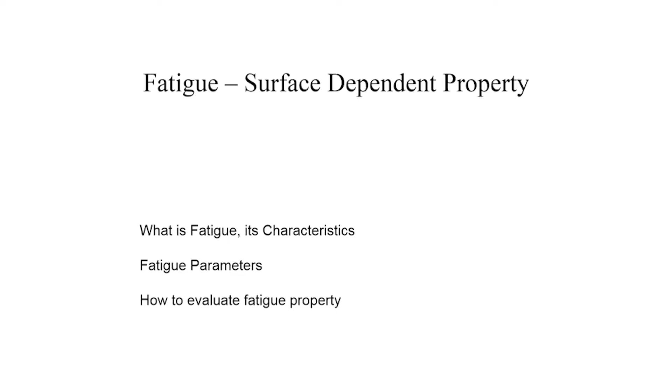Hello. In this talk, I am going to discuss another important mechanical property of matter: fatigue. I will give a brief introduction to fatigue, discuss its characteristics, the parameters which influence fatigue, how it is represented, how to evaluate fatigue properties, and finally the techniques to improve the fatigue properties of materials.

Fatigue is defined as a failure that occurs in a structure subjected to dynamic and fluctuating stresses. Under these circumstances, failure usually occurs at a stress level considerably lower than the tensile or sometimes yield strength of the material under static load.

If you go through the characteristics of the failure, it is a little different from failure under uniaxial tensile loading. It is usually brittle in nature, consists of two stages - initiation and propagation - and the fracture surface is usually perpendicular to the direction of applied stress. It is insidious in nature, making it a very dangerous form of failure in components.

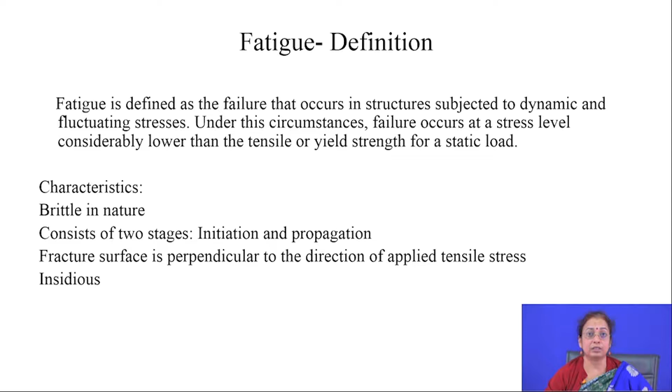Looking at cyclic stress under uniaxial loading, when a component works it is easy to define the stress level, but when cyclic stress operates on a component, you have to define the stress carefully. Usually the cyclic stress may be axial in nature, flexural in nature, or torsional in nature.

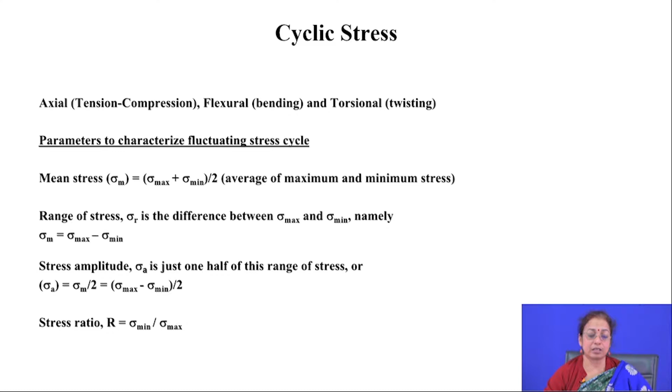Going through the parameters to characterize fluctuating stress: it may be mean stress, which is the average of the maximum and minimum stress the component is subjected to; range of stress, which is the difference between maximum and minimum stress; stress amplitude, which is range of stress divided by 2; and stress ratio, which is the ratio between minimum stress and maximum stress. By these four parameters, cyclic stress is represented. Whenever you talk about cyclic stress, you have to refer to any of these parameters.

Now, if you go through the way fatigue property is measured, it is measured by a typical testing method called rotating bending testing. In this test, you have a typical tensile specimen which is subjected to continuous rotating and bending operation.

When the component is subjected to loading, you will find that one part of the component is bent - one side is subjected to tensile loading and the reverse side is subjected to compressive loading. When you rotate the component, the reverse phenomenon occurs - the side which was subjected to compressive loading now faces tensile loading, and the other surface faces compressive loading.

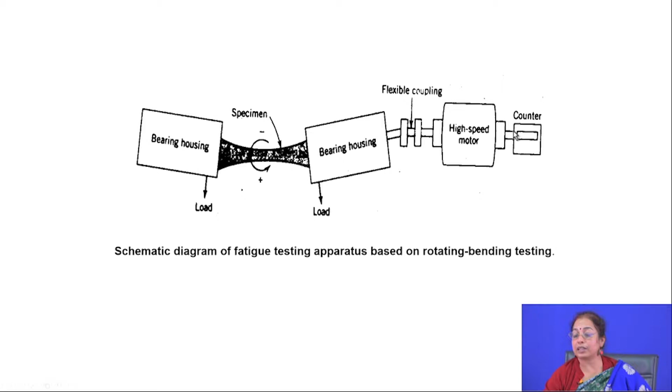By this process, the same side of the component is repeatedly subjected to compressive and tensile loading, and the number of cycles to failure is recorded with the help of a counter, defining the number of cycles to failure for a particular stress level.

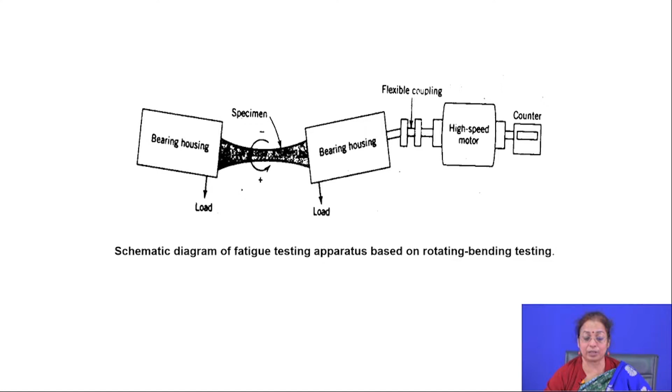In this testing, you need a large number of samples. You go on changing the cyclic stress with different values, and find the number of cycles to failure under each cyclic loading operation, under each mean stress or under each stress ratio.

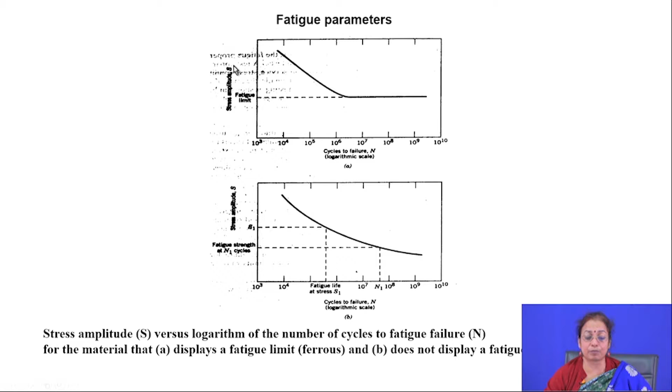Then you represent the fatigue properties in terms of cycles to failure as a function of stress amplitude, which is commonly applied as the parameter to define the cyclic stress.

If you go through the number of cycles to failure as a function of stress amplitude, you will find different behavior in ferrous and non-ferrous materials. This is a schematic representation of the fatigue behavior of ferrous material, and this is for non-ferrous material.

You will find that in ferrous material, when the stress level is below the fatigue limit - below a certain value of stress amplitude - there is no failure at all. We call this the fatigue limit. It is usually taken as the safe limit or safe cyclic stress where the component can be applied very reliably.

But when the stress amplitude increases above the fatigue limit, there is a chance of failure. So you have to use the component at a cycle much lower than the designated cycles to failure under this particular stress amplitude.

On the other hand, if you go through the fatigue behavior of non-ferrous materials, it does not have any sharp fatigue limit. As you decrease the stress amplitude, the cycles to failure actually increases. So you have to always define the typical stress amplitude at which there is a certain number of cycles to failure.

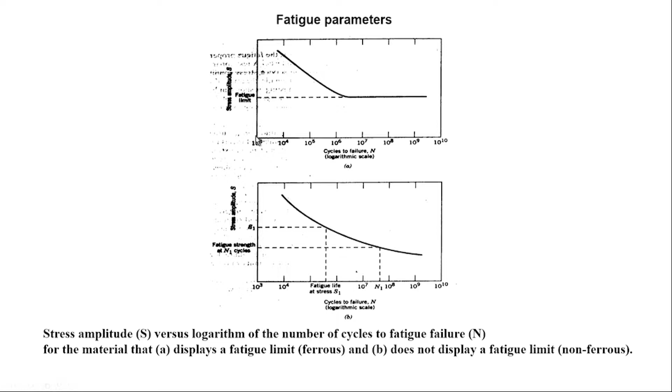So these are the two important ways by which you basically define the fatigue properties of ferrous as well as non-ferrous materials. The other way by which you can designate the fatigue properties of the material is nothing but the probability of failure.

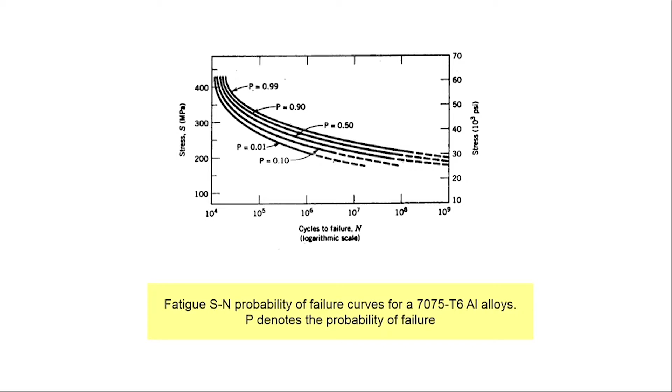So when probability of failure is negligible, you can use the particular material at that particular stress limit in a very safe fashion, at that stress amplitude, in a safe fashion.

Now, if you go through the stages in fatigue, you will find that fatigue proceeds in stages. Stage 1 is the crack initiation, and stages 2 and 3 are the crack propagation stages. So crack initiation is called stage 1, and crack propagation consists of two stages, stage 2 and stage 3.

If you go through the reason behind crack initiation, you will find it is because of the presence of impurities, imperfections on the surface, defects on the surface, and stress concentrations at the surface. So impurities, defects, and stress concentrations at the surface are responsible for crack initiation.

As I was mentioning, fatigue is very much dependent on the surface. This is because fatigue crack initiation is dependent on the surface imperfections. So if you prepare a surface free from any flaws, imperfections, impurities, and stress concentration points, you can always improve the fatigue life of the component.

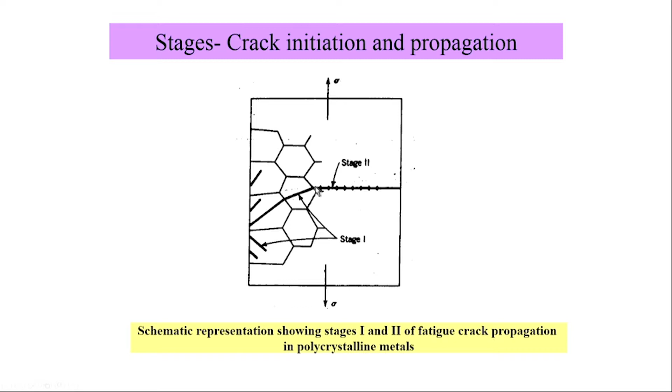On the other hand, when the crack length exceeds the critical crack length for failure of the component, the crack proceeds at a much faster rate—that is stage 2 crack propagation. It is very difficult to control. Stage 2 crack propagation rate depends on the fracture toughness of the component. You cannot, by any surface treatment, control or prevent stage 2 crack propagation.

This is very important to note: if you want to minimize or improve the performance of the component under fatigue loading, you have to improve the surface very nicely so that there are no imperfections, no inclusions, no stress concentration points at the surface. Or otherwise, you harden and toughen the surface in such a fashion that stage 1 crack propagation rate reduces to a large extent.

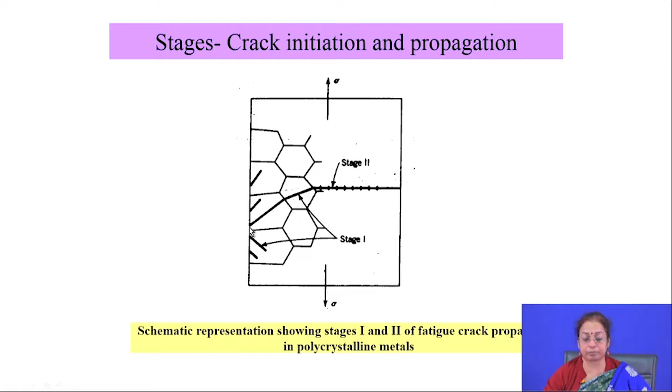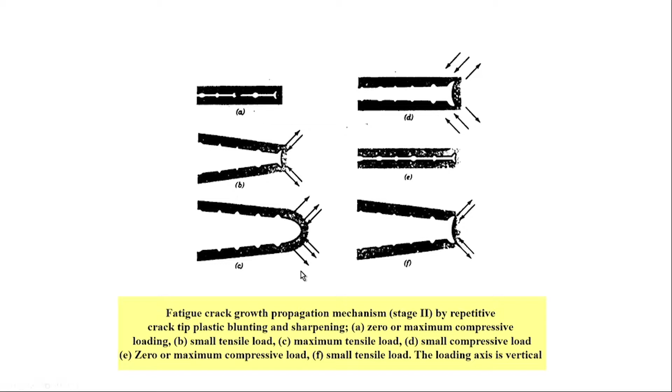Now, quickly going through stage 2 crack propagation: you will see that the stage 2 crack propagation mechanism is by repetitive crack tip plastic blunting and sharpening. So once the stage 1 crack propagation occurs...

...that creates a crack having the crack length near to that of the critical crack length. Then, whenever it is subjected to repetitive compressive and tensile loading, whenever subjected to tensile loading there is crack widening and subsequent plastic blunting phenomena, and when subjected to compressive loading, there is closure of the crack, and then again closure and again widening.

So stage 2 crack propagation consists of 3 stages: one is crack widening during tensile loading, then plastic blunting, and during compressive loading there is again closure of the crack. By this process, the crack advances by one unit step. So advancement of the crack occurs with the tensile component of the loading, and then again there is widening phenomena.

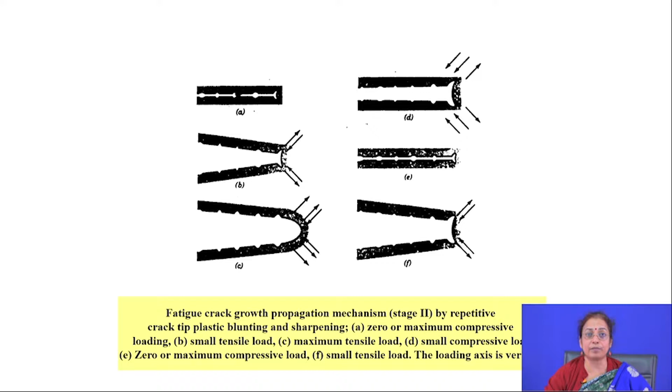So you can see that typical crack propagation or crack length enhancement occurs during the tensile component of the loading. It is very important that when you apply compressive loading, there is a closure phenomenon. So compressive stress is not really so harmful for propagation of the crack, but rather tensile stress is very harmful.

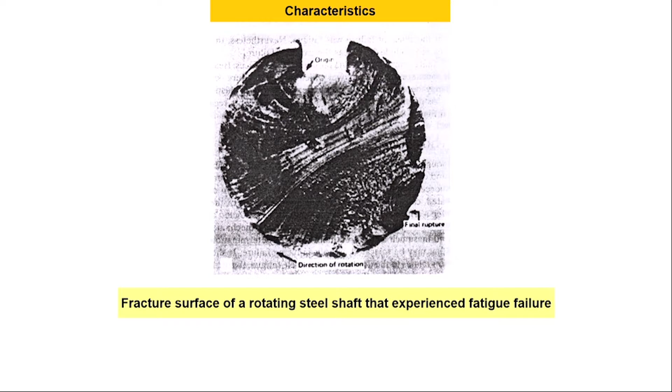Most of the crack propagation occurs during the tensile component of the loading. Now, going through the characteristics of fatigue failure: it is very important to know the characteristics of the failure of the component so that you can understand the reason, and also get preventive measures so that the component does not fail in service due to that particular failure. The characteristic of a failed surface of a fatigue-failed component is that there are a lot of beach marks, small...

...bands on the surface, like sea beach marks. When air blows on the sea beach, you find blowing marks, some beach kind of pattern. Because of this appearance, it is called a beach mark. There are also crack initiation points observed, and final cracking points are also visible. So there are 3 important features: crack initiation points observed, beach marks observed, and the failure points or zone of failure also observed in the failed surface.

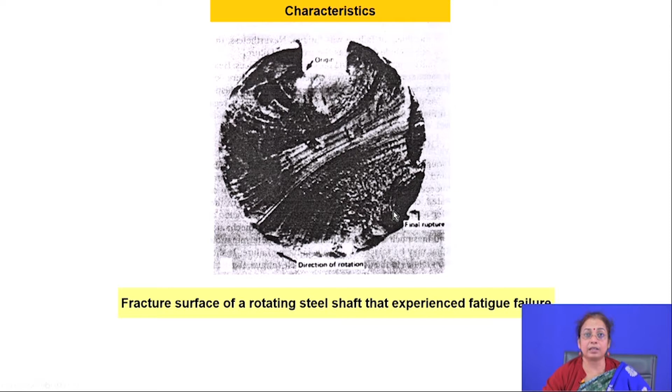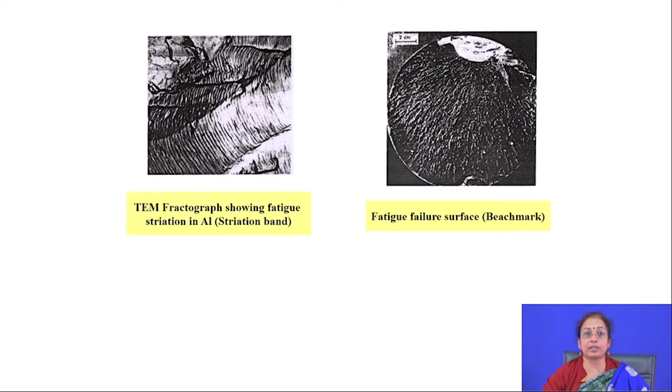Now, going through the beach mark at very high magnification, particularly through TEM observation, you will find very fine striation bands in the beach mark. This striation band length is basically the unit length that the crack propagates during the tensile loading of the component. This is a typical repetitive phenomenon, and it is very much dependent on the component, the magnitude of the load the component is subjected to, and also dependent on the microstructure and composition of the component.

Now, going through crack length as a function of number of cycles to failure, you will find that the rate of crack propagation with number of cycles to failure is very much dependent on the amount of stress amplitude the component is subjected to. As the stress amplitude increases, you will find that the rate of crack propagation also increases. So the rate of crack propagation, or the fatigue life of the component, is very much dependent on the stress amplitude value, to a large extent.

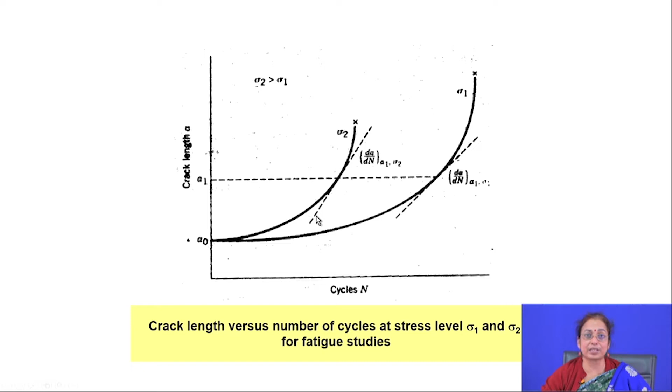If you can reduce the stress amplitude by that process, you can reduce the crack propagation rate as well. Let's quickly go through the parameters which control the crack propagation rate, where A is the crack length and N is the number of cycles to failure.

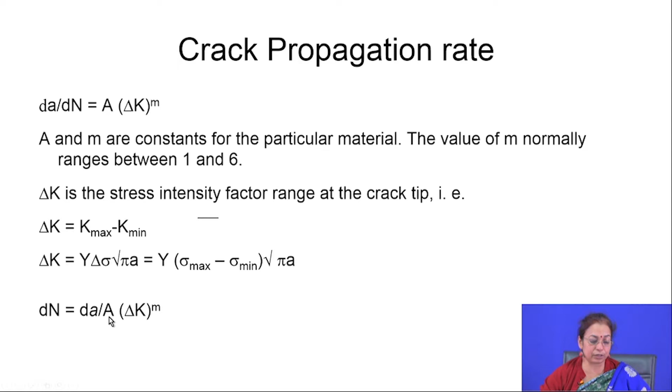If you go on measuring these and plot the fatigue crack growth rate as a function of stress intensity factor on a log plot, you will find there are 3 regions. Region 1 is where there are non-propagating fatigue cracks, region 2 has a linear relationship between log del K and log dA/dN, and region 3 is unstable crack growth where it is very difficult to control the crack propagation rate.

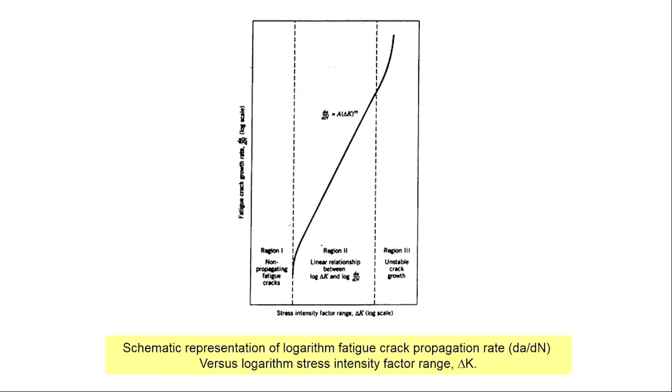So usually the material is safe, or it is better to use the material in region 1, where the fatigue cracks cannot propagate. This is a very useful plot to determine the service usefulness, to dictate the fatigue stress intensity range, or the stress range, or the fatigue limit of the component where it should be used.

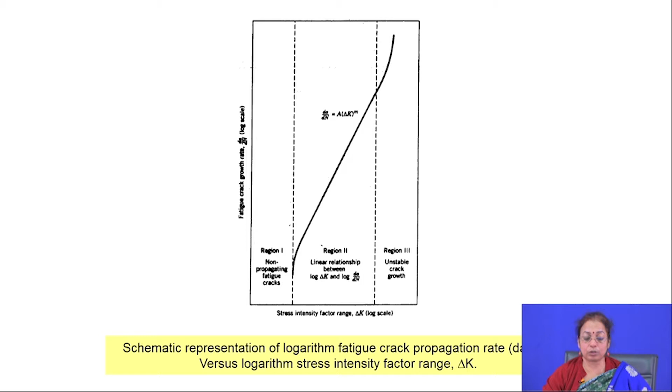Now in summary, we can say it is very important to concentrate on the surface in order to improve the fatigue life of the component. But in most cases, particularly when the component is in service, if you have to design it for improved fatigue life, usually it is done by proper designing.

The basic phenomena or key point is that you have to avoid the points where there is a chance of stress concentration. This is done by proper designing of the component. Usually you should avoid sharp points or corners and make them a little smoother, wherever there is a chance of change in curvature. By this process you can improve the fatigue life.

You can also improve the fatigue life by proper surface treatment. The important surface treatment techniques that most people apply try to avoid the points of stress concentration, reduce the roughness of the component, and reduce imperfections on the surface, and reduce the stress level on the surface. This is done by proper polishing operations, including electropolishing, using polishing operations that do not create much stress on the surface.

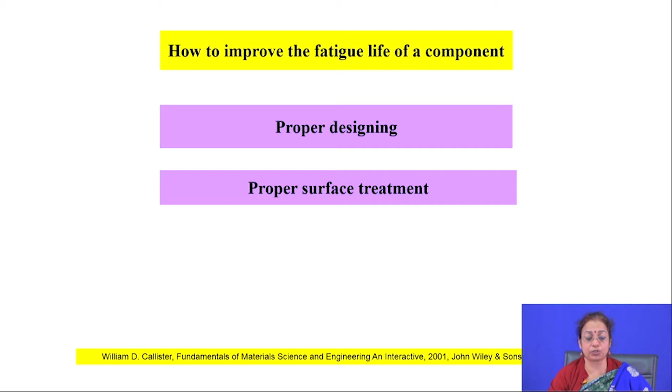If you quickly go through the stages of crack propagation, particularly stage 2 crack propagation, you'll see it consists of repetitive crack widening, plastic blunting, and then closure of the crack. Closure usually occurs when compressive stress acts on the component. So compressive stress is beneficial in improving the fatigue life of the component. If by any technique you introduce compressive residual stress on the surface, you improve the fatigue life of the component.

Compressive residual stress is usually applied by different ways like shot peening, laser shock peening, low plasticity burnishing operation, and deep cold rolling processes. These techniques are widely applied for introducing residual compressive stress on the surface.

In shot peening operation you go on impacting shots made of steel or ceramic materials, usually spherical balls, which are thrown onto the surface at a certain velocity. This introduces a lot of compressive residual stress on the surface, but the main problem is that it introduces nano or sometimes micro deformation on the surface. So whenever you do shot peening, you have to be careful about the appearance of the surface. But it is a very good technique because it takes care of the fatigue property and also cleans the surface to a large extent.

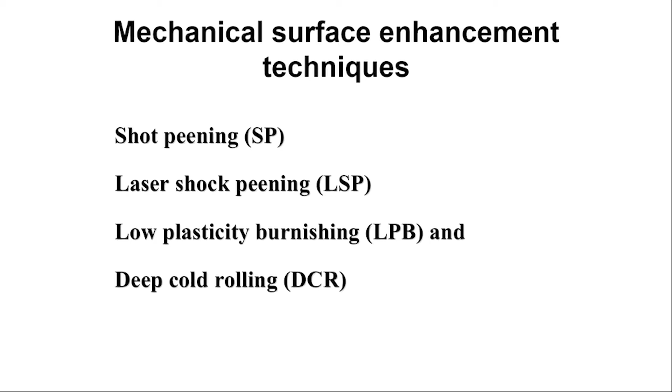Usually if you apply shot peening after carburization, or flame hardening, or induction hardening, note that these processes form a very thin oxide layer on the surface, so the surface is not so clean. If you apply shot peening afterward, it cleans the surface to a large extent, and in addition introduces compressive residual stress on the surface. So this process is very beneficial in improving the fatigue life of the component.

Laser shock peening is another interesting process, where a high powered, high energy density pulsed laser beam irradiates the surface of the component. When it irradiates the surface, there is ablation of material from the surface, and the energy density is so high that the ablated gaseous species convert into plasma. That plasma applies pressure on the surface of the component, and that pressure causes compressive residual stress to be introduced onto the component. This is called laser shock peening.

This operation can be conducted in air, in water, or with a very thin black painting applied on the surface. If the surface is covered with water or black paint, it minimizes the probability of ablation of material from the surface. Instead of ablation of material from the surface, there is evaporation and plasma formation from the media, maybe water or the ink. That evaporated material forms plasma, and that plasma applies pressure on the surface.

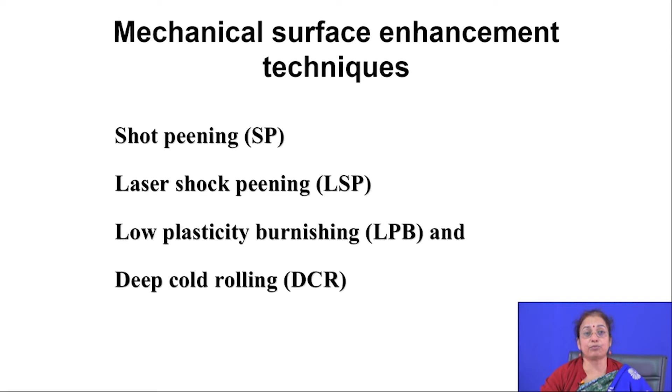By that process you can get rid of discontinuities on the surface or any other impurities present, which reduces the probability of crack initiation. You can also improve the fatigue life of the component, particularly by minimizing the stage 1 crack propagation rate, which can be achieved by surface hardening operation.

Different surface hardening treatments are available which can be applied for improving the service life of the component under fatigue, for example carburization of low carbon steel and subsequent tempering operation. This is a very good treatment for improving the fatigue life of the component.

Usually when you do carburization or nitriding, a very thin hardened layer is formed, and that layer is harder than the pure metal. So it increases the hardness and also the fatigue limit of the component. These are different ways you can improve the fatigue property of the component.

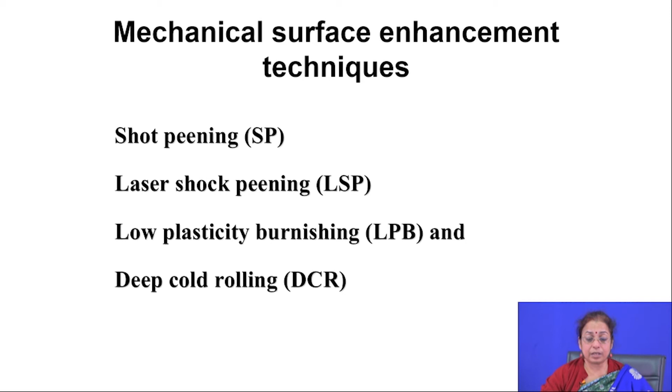Now in summary, we can say fatigue is a surface-dependent property mainly because it initiates from the surface, and also a few layers from the surface, after a certain depth, the fatigue failure can be controlled if precautions are taken.

Particularly by the application of residual compressive stress or by application of different hardening techniques, the fatigue crack propagation stage is also controllable, and the layer has to be tough. Because of these two reasons, fatigue failure is actually a surface-dependent failure.

We also discussed the stages of fatigue failure: stage 1 and stage 2. In stage 1 there is crack initiation, in stage 2 there is propagation. Stage 2 again consists of two different stages, step 1 and step 2. In step 1 the crack propagation rate is very slow, and in step 2 it is quite fast in nature.

We discussed the characteristic features of fatigue failure - usually beach marks, the crack initiation sites and crack propagation sites are three important characteristic features of fatigue failure.